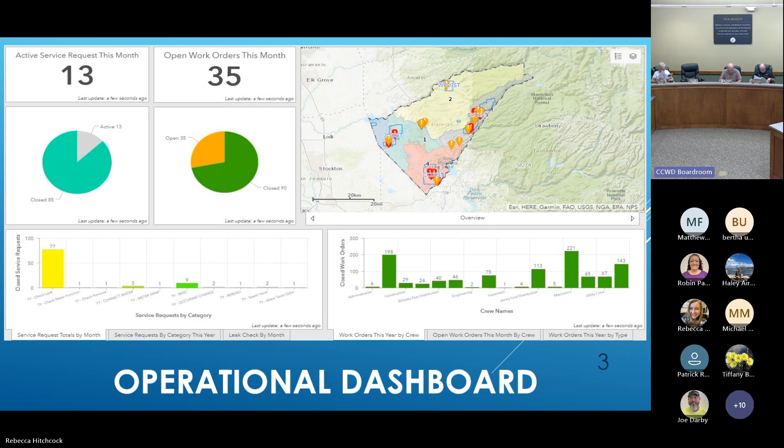Service requests come from customer service, generally involving a customer or a phone call or something that happens through the customer service department. Work orders generally come from other departments within operations. So a treatment operator could issue a work order to an electrician to repair an item.

So right out of the gate, this one right here is check for leak. This is service requests above and beyond anything else. What we get are check for leaks. You have other parameters in here: check meter function, check pressure, connect water, meter swap, miscellaneous, occupant change, reread, what have you. So check for leak is right up there at the top.

Here we are with service requests by category over the year, and we're still at check for leak, 388 check for leaks. And here we are jumping into leak check by month. As you can imagine, August and September, leak checks kept increasing over the month. As the wet season comes, obviously leak checks will drop off because folks won't notice leaks as much.

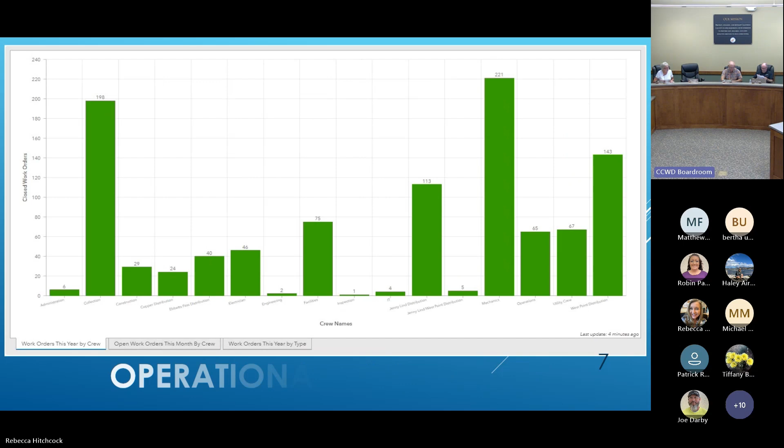All right, moving into open work orders this year by crew. From left to right, you have your administrative crew, that would be the ops managers. Then you have collections, so anything involving a wastewater pipe. Then you have construction, and you move all the way through all the different disciplines. Then way over here on the right, almost to the end, the very large one is our mechanical crew. They have a ton of O&M, PM work orders, preventative maintenance associated with generators.

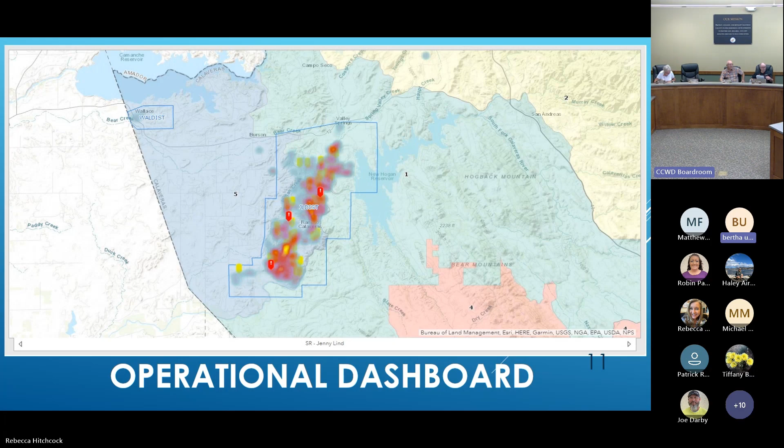And this is a heat map. What these are is they give you an at-a-glance look at where our repairs are. These are associated with service requests, which, like I said, are customer-based issues. So you can see that you start to get to yellow and white right there in the middle of Rancho.

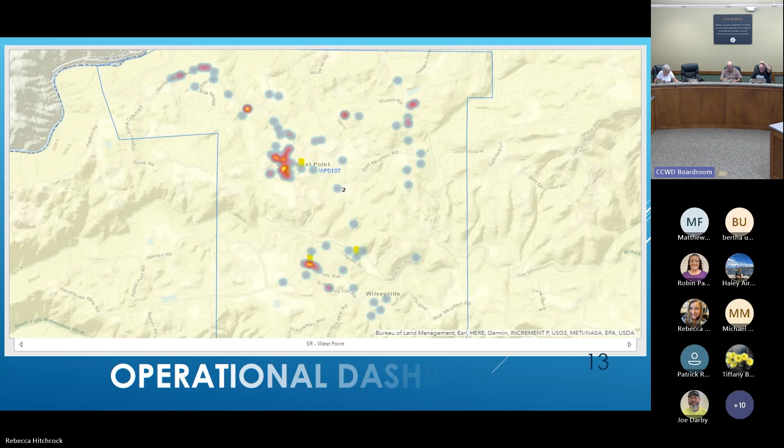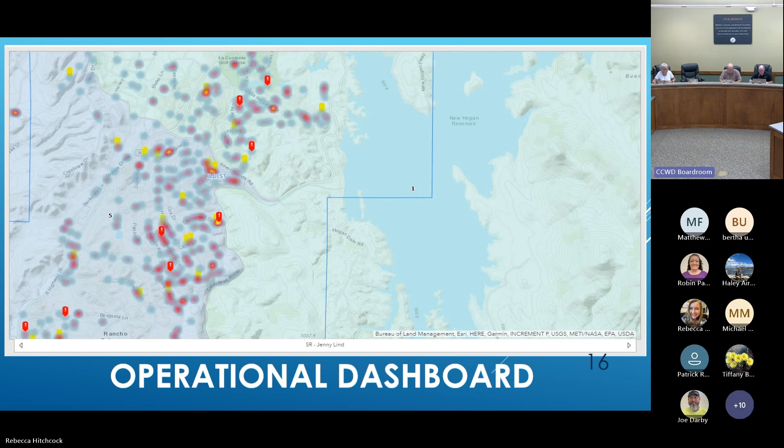So these are new service requests? So this is a heat map of all existing and all previous service requests. This gives you an idea. So what we use this for is it gives us an ability to understand where our areas are starting to fail more greatly than in other areas. This has nothing to do with new service, it's all service requests - this could be check for leak, check pressure, repair, or check meter function. Okay, yep, all tallied up. And so this is just breaking up the different parts of the service area.

And now we dive into work efforts. I have to acknowledge that the Jenny Lind distribution crew - I guess A2B kicked off in October. But right before it kicked off, we fixed 50 plus service lateral leaks while we have a crew replacing service laterals. So that work is going to continue.

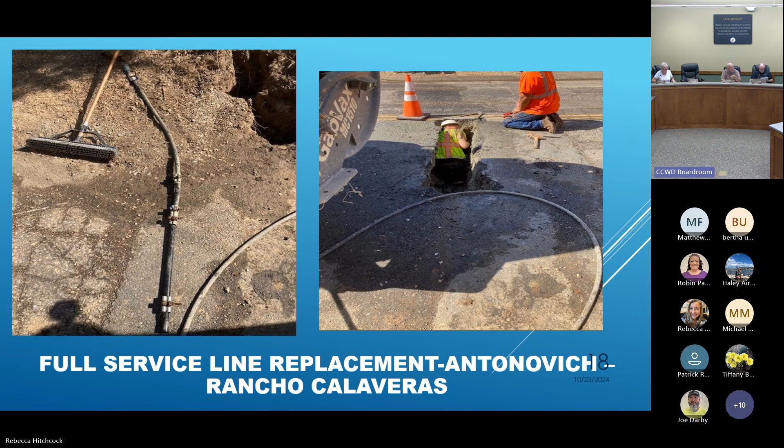And here we are - this is a full service line replacement on Antonovich down Rancho. You guys have seen this before: connect the flare to the main, run a piece of what we call tough tube to the meter box.

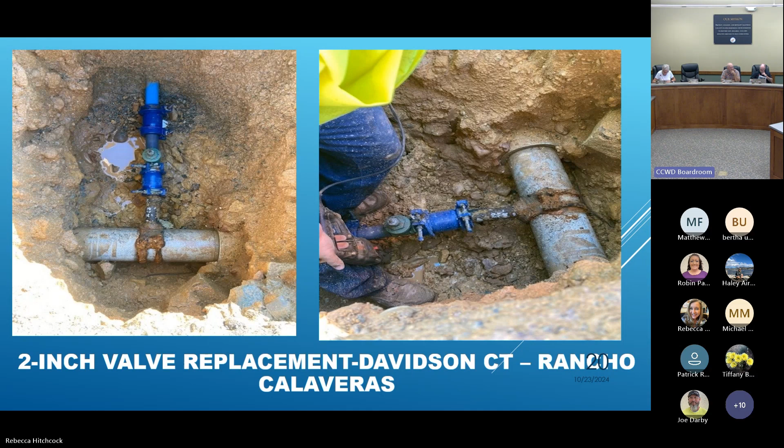This is a 2-inch valve replacement on Davidson Court. So you can see a dresser coupling, and you can see that tap saddle is basically corroded almost to nothing. So our folks got in there and replaced that 2-inch valve and the tap saddle, and we're back in business.

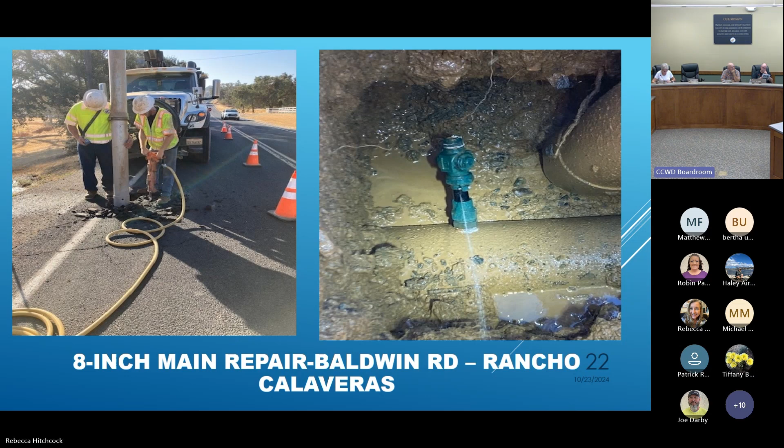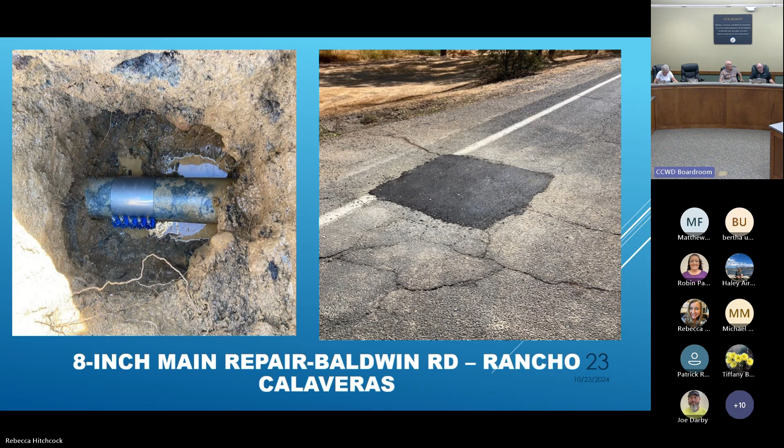And this illustrates the repair that was made on that AC main and the temporary patch on the asphalt in the image on the right.

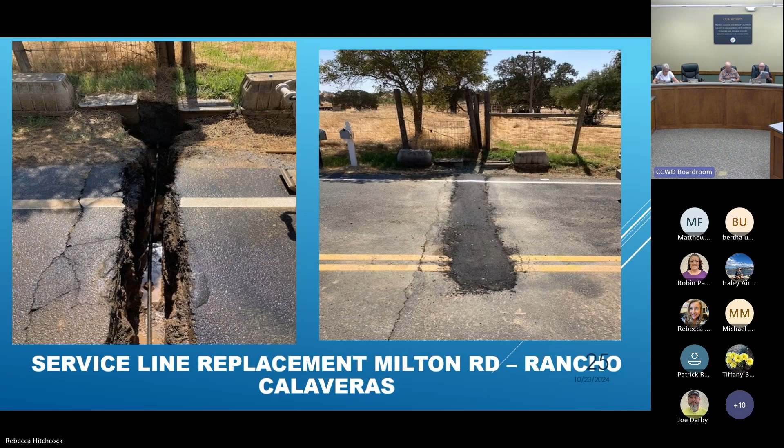And here's another service line replacement in Rancho Milton Road - guys just getting after it. And then the temporary asphalt backfill on the right, compaction. So here's West Point, more of the same service line repairs. We have one distribution crew member up on West Point and a treatment operator, and they work really well together. They do a lot of good work together.

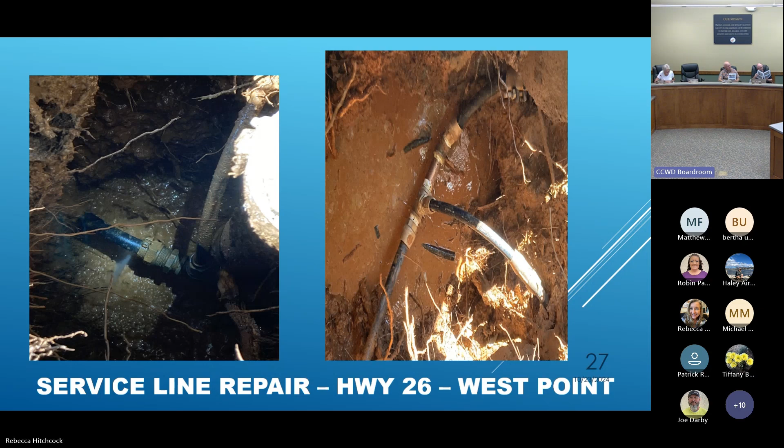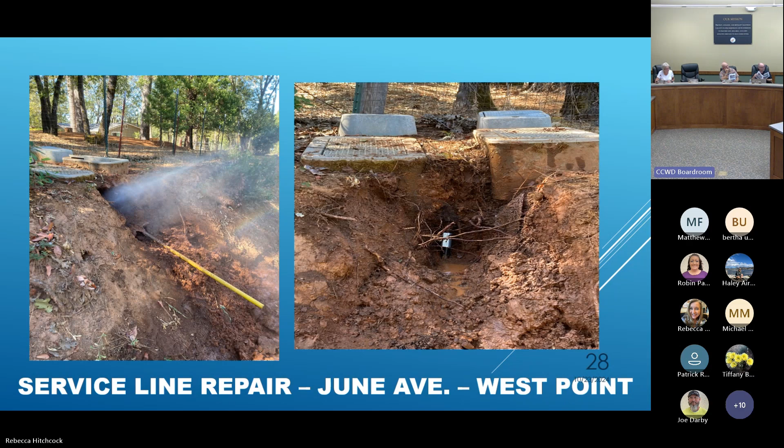So here you can see a service line repair image on the left, kind of hard to see - water blowing out of that poly tube and repair on the right. This is what a manifold service, like I was telling you all about - you got 2 meters coming from one service line from the main. This one dug its own hole, so that's pretty nice. You just walk up and slowly shut the water off, put a repair clamp on it, and you're the hero and you walk away. So great work for our folks there.

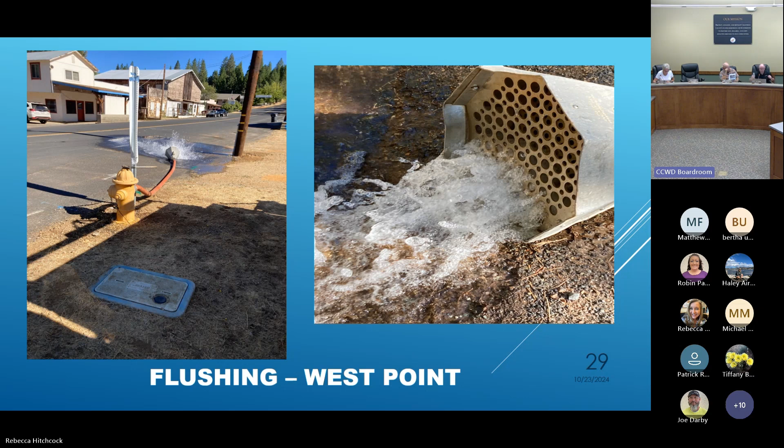So water quality - the undergrounding completed by PG&E and their subcontractors created a whole host of issues for us when it comes to water quality in West Point, because a lot of sediment that would be settled on the bottom of a water main came into solution and entered people's homes. So CCWD staff spent a lot of time in West Point working to flush that system in September. We actually got to tip my cap to Will Harris, who's a representative for PG&E.

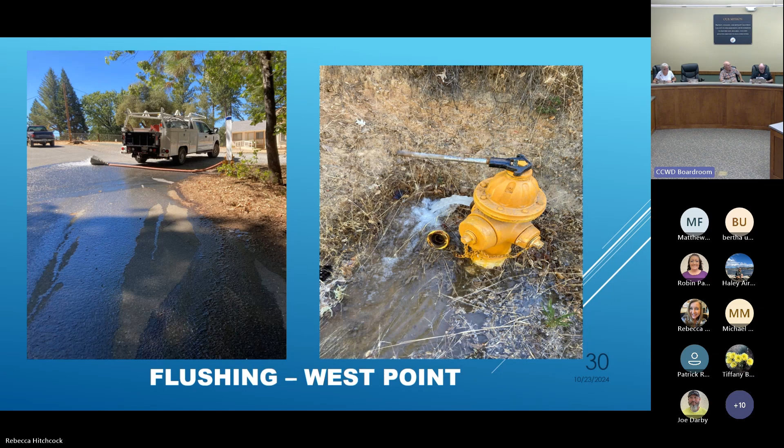We put the bulletin out to him, and he went to all these yards where these subs are reporting in the morning and let their foreman know that if you have a water buffalo and you're going to pull water, you actually need to get a construction meter from the water purveyor. You can't just rip a hydrant, shut it off, and expect everything to be normal. That was really helpful for all of us and minimized the impact the rest of the month for our staff over in West Point. So hats off to Will Harris - thanks for doing that, because this takes a lot of time.

Not that it's not a valiant work effort, but if you don't have to do it and you have other work to do that jumps right in your way, it can be really tough.

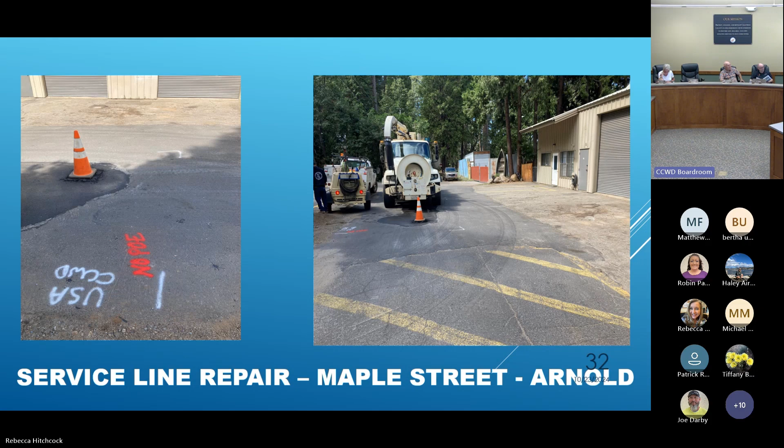Service line repaired. Now we're up into Ebbets Pass up in Arnold. This was the accuracy month for the Ebbets Pass distribution crew. Oftentimes you don't necessarily know where the repair has to be made on the service line, so you need to use a listening device to pinpoint exactly where you might want to dig. If you're dealing with asphalt, you want to minimize the impact as much as possible. So these guys found that spot, made that cut, and there was the repair. Hats off to them, pretty accurate.

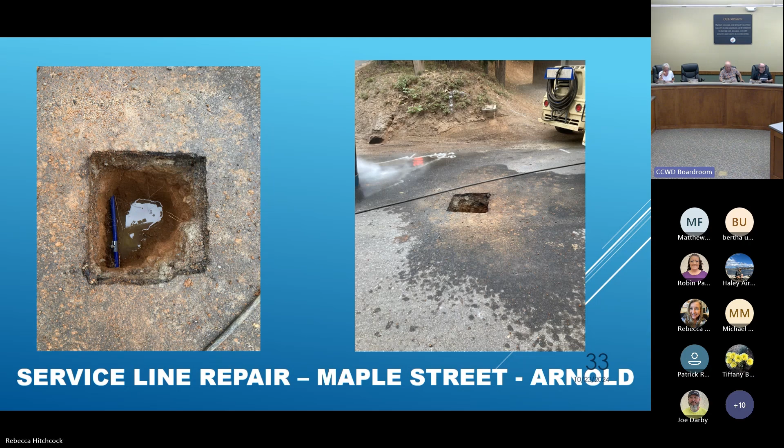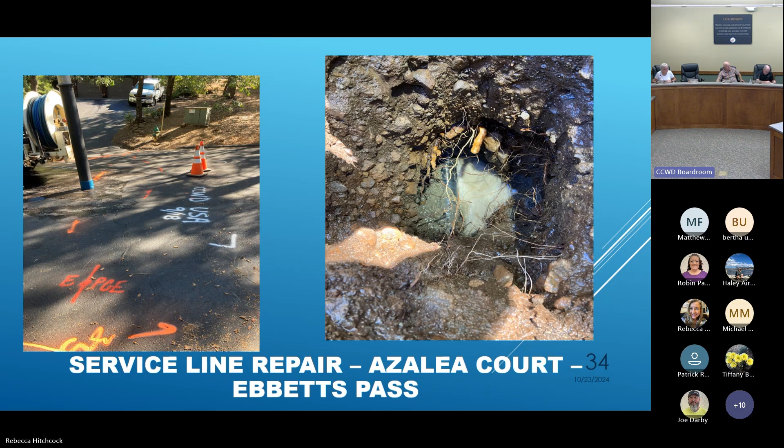This is Azalea Court, another service line repair. We've talked about this in the past. The image on the left is the underground service alert markings: red is power, orange or yellow is telecom, and white is the USA marking. You can see that pickup tube on the VACCON with the light blue cover, so it's non-conductive. This service line repair is under a bunch of underground electrical. If you look at this image, the water line is at the bottom of that trench, and all of those are electrical conduit.

So this is from a safety perspective. We've gone round and round with PG&E, both in Poker Flat and the Copper Cove area, service areas up to Big Trees Village, to talk about this issue. We have common trench with water and electricity, and most people feel like water and electricity don't mix. Our guys are in that trench.

So when they have to go out there and make a repair, it's really... it's kind of like you're on heightened alert. Damon, when you bring that up to PG&E, do they just say, well, move your water line? Yes, exactly. Right.

And so we actually, to their credit, they met us out in Copperopolis and we looked at multiple sites. They wanted to look for a way, because we want them to implement a project to relocate their electrical. We're going through and replacing all of our service laterals. Their statement was there won't be any projects of that nature in Calaveras County anytime soon, but they do recommend we relocate our service lines. I said, well, thank you, that's really helpful. It's good that they're undergrounding some of their electricity though. That is a positive thing.

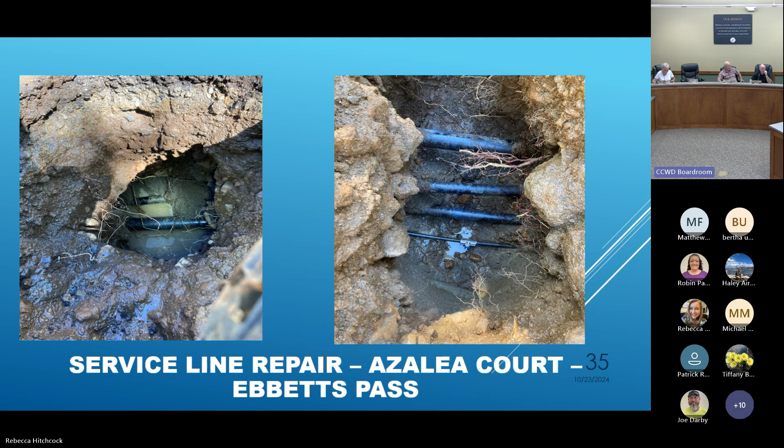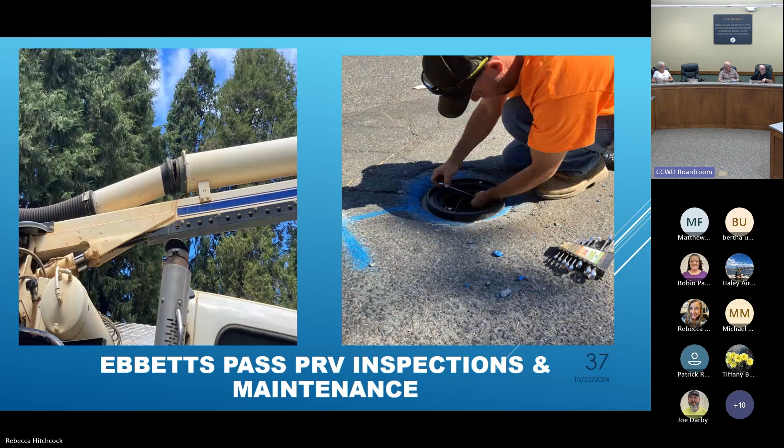Damon, could you go back to that one on the left? Is that a preventative maintenance job? It is. It can fall under a couple categories. It could fall under a county project where we give the county grade rings, and if they're going to grind out and repave a section of road, we'll give them those and they'll raise the lids. But it can also be something we do on our own, where we chip around that and put in a grade ring.

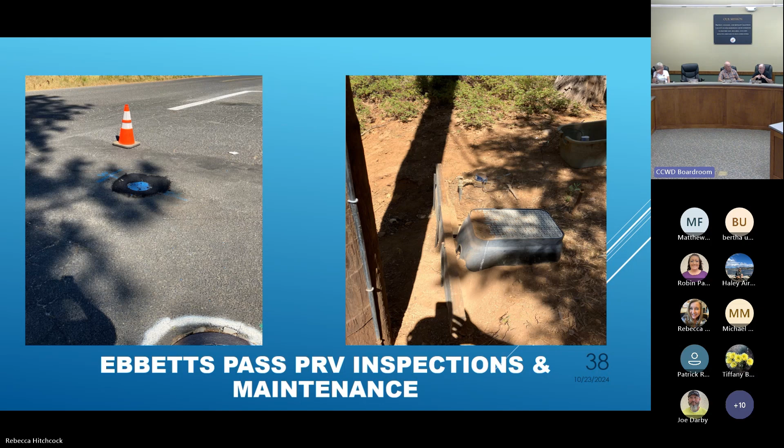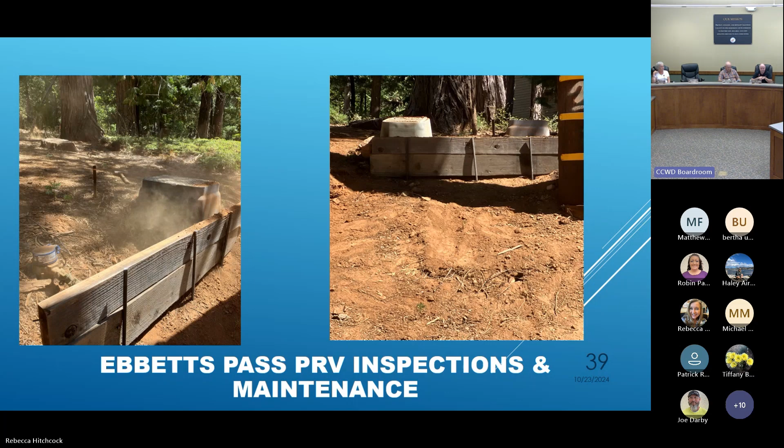I learned this from our insurance carrier, JPIA. One of our largest liability claims ever here at CCWD involved someone hitting one of our raised manhole covers, up in Arnold. It was determined to be our responsibility for not having it level when they were doing snow removal.

Hey, good on you for sure. Good preventive maintenance. Yeah, absolutely.

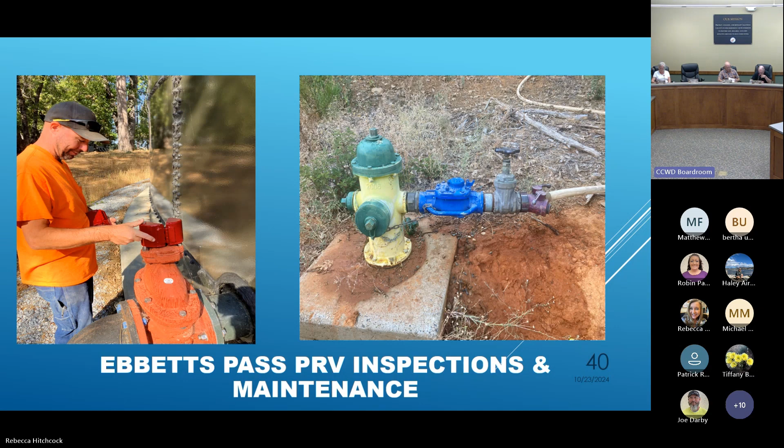Here's more of the same. That's what a fire hydrant meter looks like, shown in the image on the right. You've got the meter and the isolation valve. Oftentimes the contractor will operate that valve and put their own lock on it, and we'll read that meter every month so they pay for the consumption. In the image on the left, we're putting a locking apparatus on a discharge valve on a tank, since folks love to go up to the tank valves and open them. We want to make sure that doesn't happen.

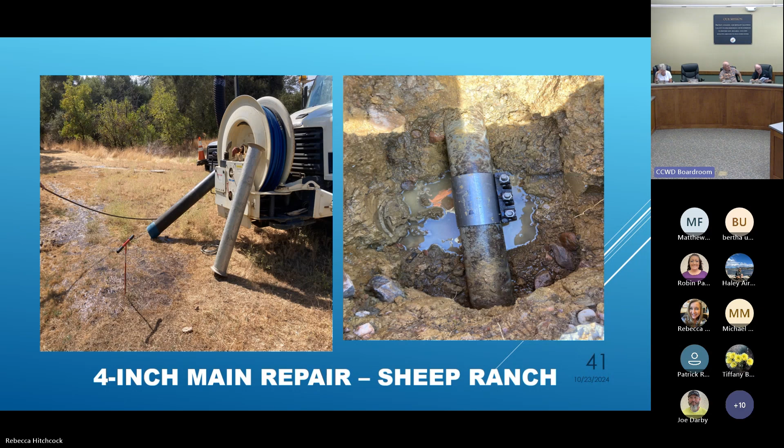Here's a 4-inch main repair at Sheep Ranch. There are 4-inch AC water mains in Sheep Ranch, and this one is a cross-country line that our folks repaired after hours.

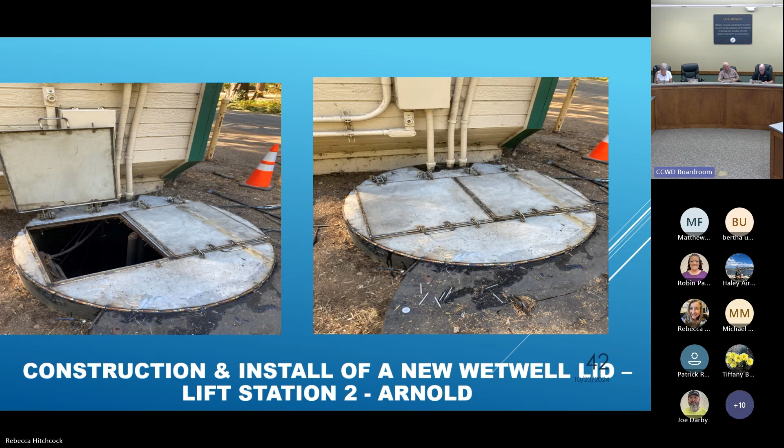That's really important. So with safety issues, are you taking photographs and writing this one up? I've submitted multiple safety award applications. The mechanics are running away with the baton when it comes to JPIA submissions. They're doing awesome, I'll look for them.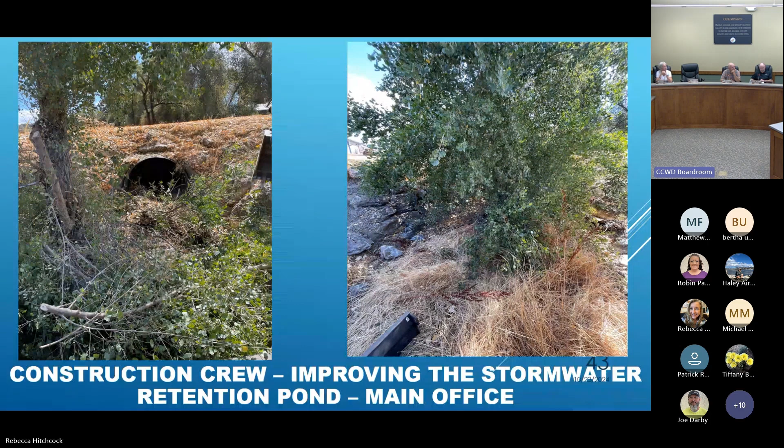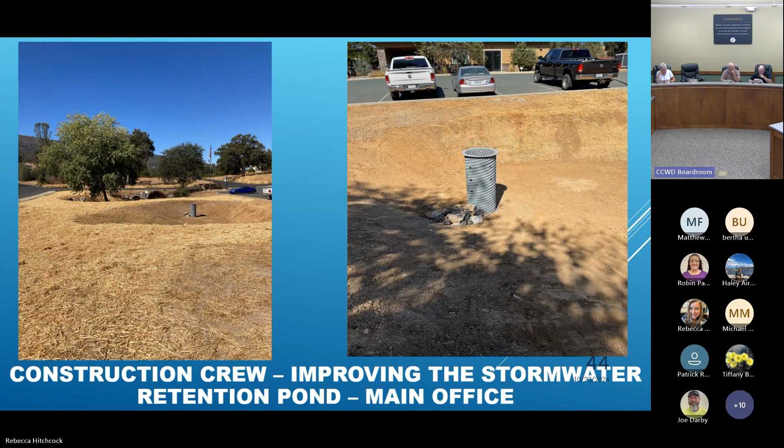This is right outside here, the stormwater retention basin. Our construction crew went in and cleaned up that basin, and they also installed the discharge piping for the retention basin, which can regulate the output from the basin. We're happy to report that I don't anticipate any additional work to happen in that stormwater retention basin in the near future, or perhaps ever.

Do we have to sign an annual contract for maintenance? I do not believe so. I am being asked to do that for my clients, they have to hire somebody. So I'm thinking of just getting trained to be the guy that goes out and inspects those. They want you to sign an annual service contract for the maintenance of these systems. Wow, so don't bring that up. No, not at all.

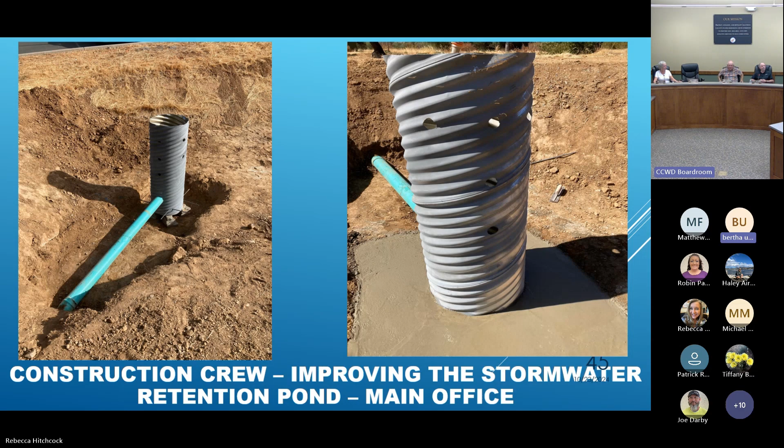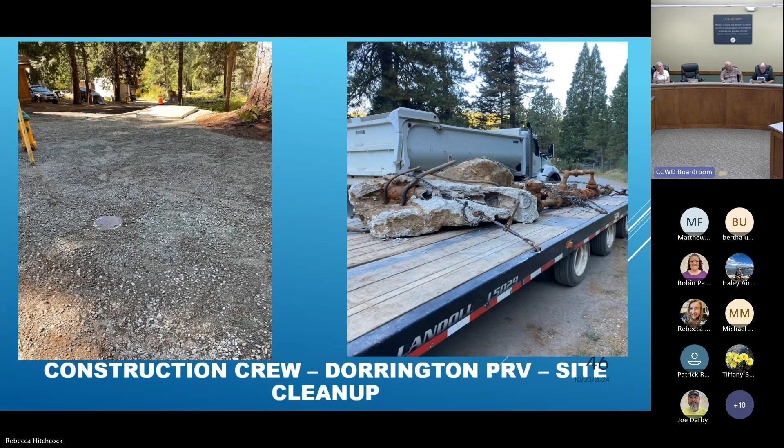In August, you'll recall, we replaced the Dorrington pressure reducing valve station, and we completed the last cleanup of the site. That's the image on the left, kind of at the top of the screen - the pressure reducing valve vault in the ground, everything cleaned, lids to grade in the base rock, and getting rid of the rest of the final bit of trash in the trailer, shown in the image on the right.

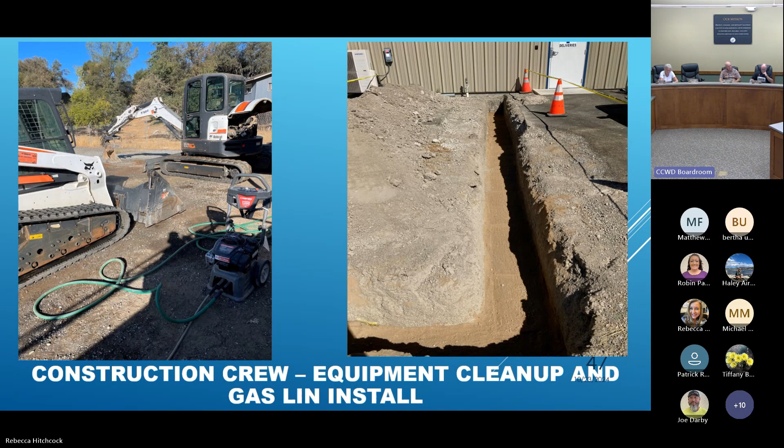This is the installation of the gas line, right out here at the maintenance shop. That generator - we're just waiting for the regulator from PG&E, and we'll have that natural gas generator hooked up and installed and ready to go.

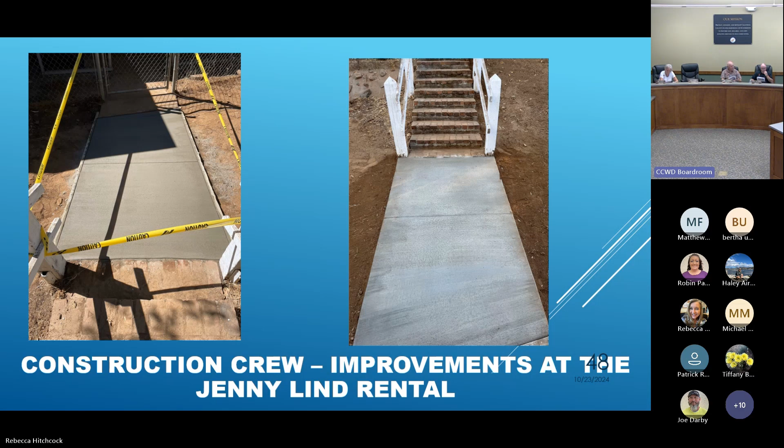This is the rental property off of Silver Rapids Road - pouring some concrete sidewalks and completing some incidental work.

Why is White Pine so low right now? I believe that's just the natural inflow into it. We actually increased the outflow just a little bit so we could get rid of more of the tules.